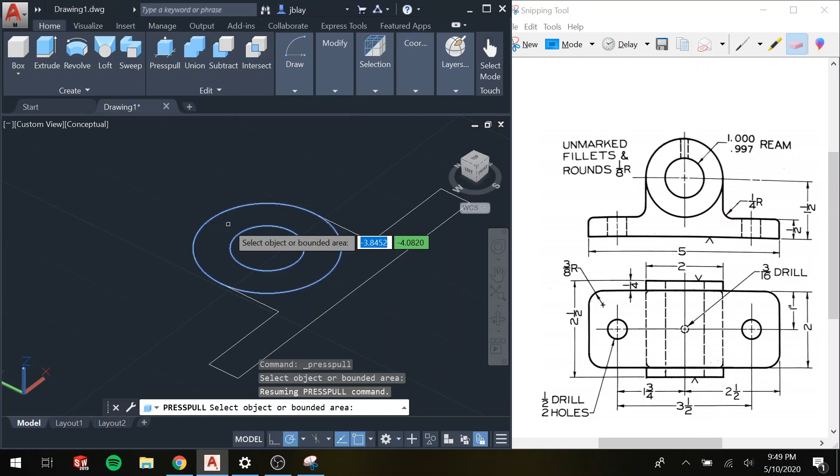It generally will work without joining. There are some instances where it doesn't, and it looks like they updated this new version of AutoCAD to work in a few less scenarios, but it still will work in this scenario. So I can click in here, and I can pull up just that bounded area, which is super convenient for this. Okay, so let me extrude by the depth.

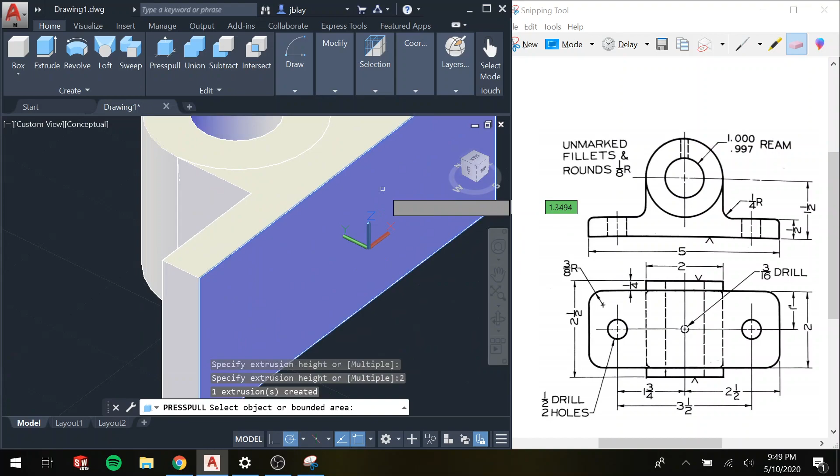I'm not going to do the full depth, 2.5 inches. I'm just going to do this middle area, 2 inches, and then I'll take care of these little extra bits that this cylinder up top goes. It's really easy, I'll show you guys how to do it. So I'll extrude this 2 inches, and then I'll select in this bounded area as well and extrude it 2 inches. And we kind of see this thing starting to take some sort of shape.

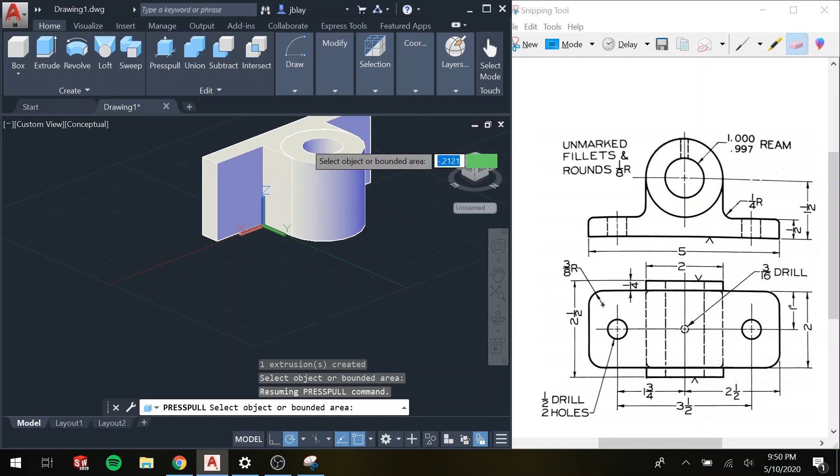Okay, cool. Now what I want to do is pull this cylinder out a little bit further in each direction. Let's see by how much. So this is 2.5 inches. This is 2 inches. The difference is 1/2 inch, so it's going to be 1/4 inch on each end. So I'll show you how easy this is. I don't have a sketch up here now. I just have this cylinder.

But if I type in press pull and I select this bounded area, even though there isn't a sketch, I have a bounded area, it will allow me to pull it up and out. So I can type in 1/4 inch and do the same thing on the bottom. I can select this bounded area. Be very careful to make sure you're not intruding by accident. Make sure it's actually pulling out of the shape before you type in 1/4 inch.

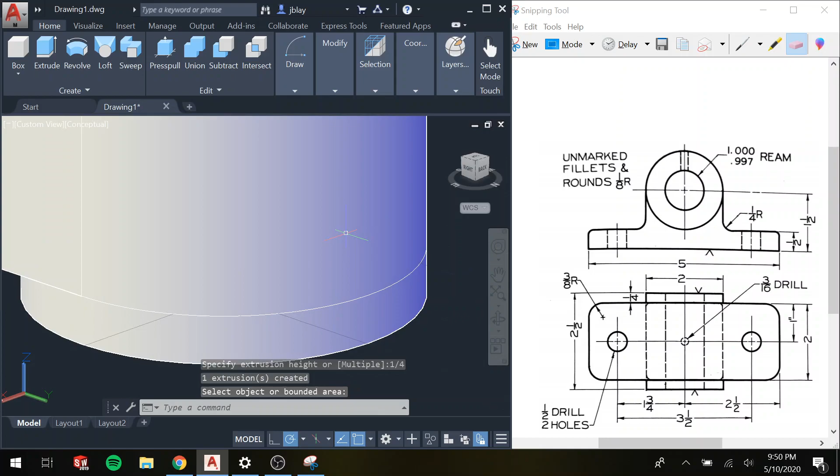And there we have it. We have that kind of pulled out segment. The really nice thing is it makes this whole thing one object. The cylinder is one object, even though it's 3 separate extrusions. Really convenient. All right, now before I do anything else, I'm going to rotate 3D this shape. I want to make sure I select both objects because I'm working with 2 separate objects right now.

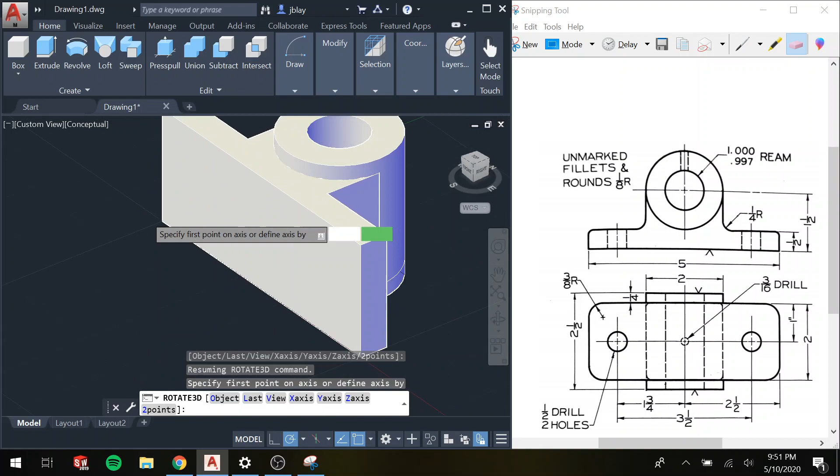Select my axis of symmetry, 90 degrees. Great. Because this is going to make it a little bit easier to work. Now I have the front view, top view, right side view exactly where they should be. You'll notice that I've left behind these lines because when you use press pull to do any action, it will leave the lines behind, unlike extrude, which gets rid of them, which is kind of not a friendly thing about press pull.

Okay, next thing I'm going to do is I'm going to take care of the 2 holes over here. I'm not going to do this one up here like I said before, and the reason for that is in order to do it, you would need to create a plane up there to work off of, and that's something we're not going to get to in this lesson. We're going to do it probably next week or the week after, but I don't want to go into that totally brand new different topic. So we're just going to leave that hole out.

Okay, let's draw holes up here. Let's start by drawing some construction lines. Those are definitely going to help us here. So I'm going to draw 2-point construction lines, one over here, and one over here. And what I'm going to do, oh, it restored the other ones, which makes sense because I've turned my construction line layer back on as I'm working with it. And then I'm going to offset them in each direction. Offset.

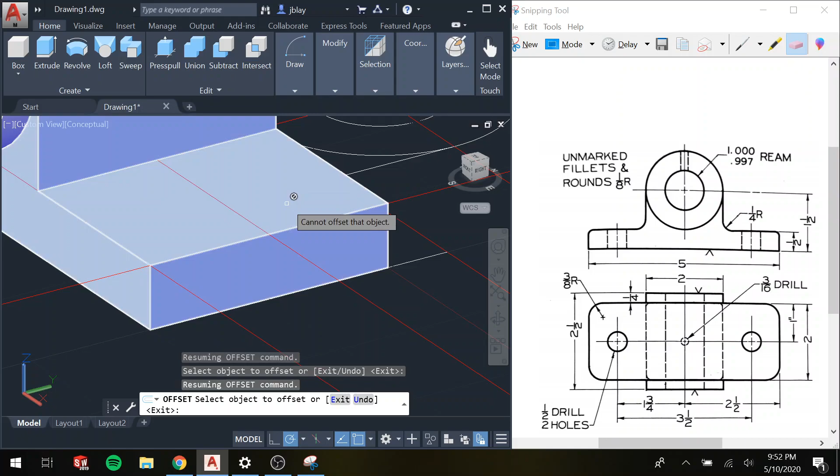First, this one's going to be 1 inch. This is going to be in 1 inch. And I want to rotate a little bit to make sure it went in the right direction. We're not working on a weird plane or anything. Okay, that looks good. And then we're going to offset this construction line. And it goes in, let's see here. We got to do a little bit of calculation. So this is 3.5 inches between these. This is really annoying that they did it this way.

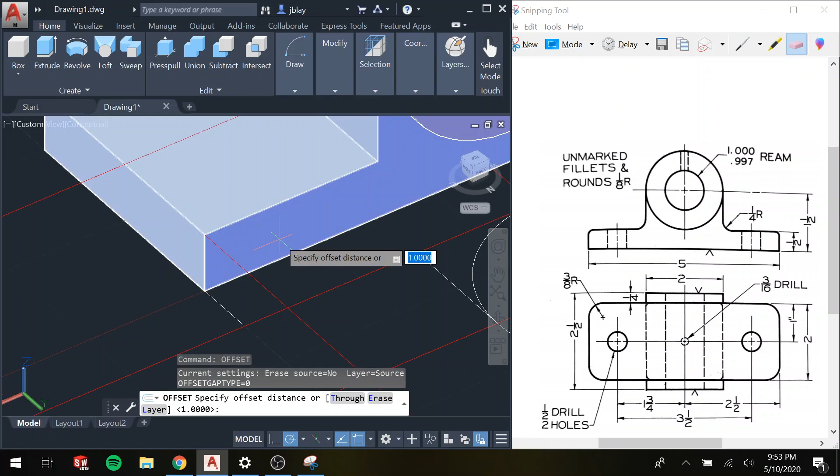Okay, this is 2.5 inches. And this is 3.5 inches. 3.5 inches divided by 2 is 1 3/4. So this section here is 1 3/4. So this is going to be 2.5 minus 1 3/4. So that's going to be 3/4 of an inch. Okay, great. So let me offset by 3/4 this construction line here. And then I know my hole is going to fall right in that space.

So I'll draw a circle, make sure it's highlighting blue, and then I'll set the radius to be, let's see, where do we have the radius of these two? Okay, great. This is going to be a 1/2 inch drill, 2 holes. 1/2 inch, that's diameter. So our radius is going to be 1/4. And then we'll press pull and just pull it down. I'm not even going to type in a number. I'm just going to pull it down all the way through, and it puts a hole there for us. Fantastic. Then we need to do the same thing on the other side.

There is an easier way where I could have just done this twice in one go, but we're going to talk about that again on a future day. I'm hoping to not overwhelm you guys just yet. So I'm going to do the same thing as I did on the far end on this side. Draw my construction lines first, then offset first by 1 inch. Be very careful not to select the wrong construction line. I actually don't need to offset this one because it went all the way through. But I guess what's done is done.

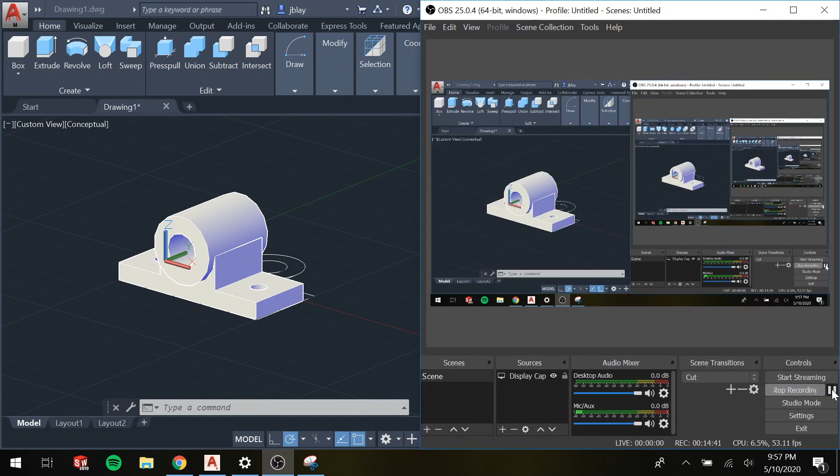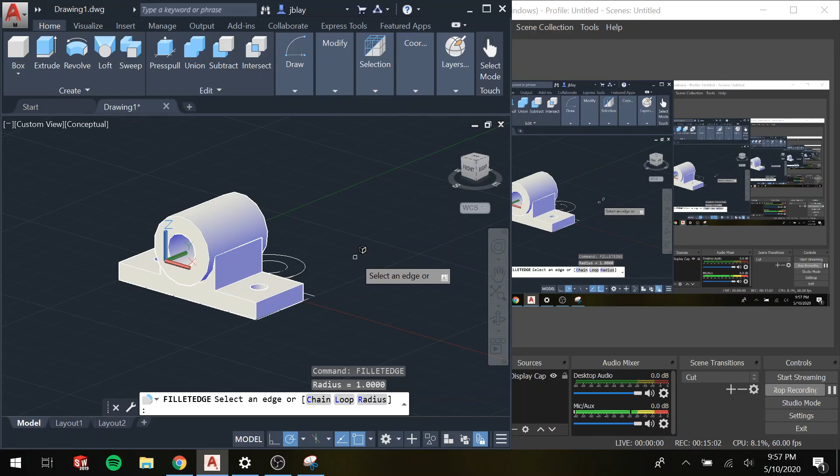I want you to type in fillet, and you're not going to go to fillet because this first fillet that you see, that's for 2D filleting. We want to do 3D filleting, so we're going to type in fillet edge. That's what we're going to use, fillet edge. It's going to prompt you to select an edge, but you don't want to start selecting an edge right away because you want to first input your radius.

If you look at the command bar, you're going to have chain, loop, or radius. If you don't have this in your command bar, you could press down on your keyboard to get to radius and hit enter. We want to enter the radius we want to achieve. I know I want my radius for these two corners to be 1/4 of an inch, so I'm going to type in 1/4 of an inch.

And now I will select the edge that I want to fillet, and I'll select the other edge I want to fillet at that size. And I'll hit enter. Press enter again to accept the fillet. And just like that, it puts a filleted edge right there for me. Really easy, really convenient. Okay, let's take care of these two over here.

So I'm going to go fillet edge again. This time, since I'm doing these two corners, the radius is going to be 1/8 of an inch. I'll select the two corners. I'm not hitting enter, I'm just clicking on them. And then I hit enter, and then I hit enter again. Okay, now I need to take care of these 4 corners and I'm going to be done.

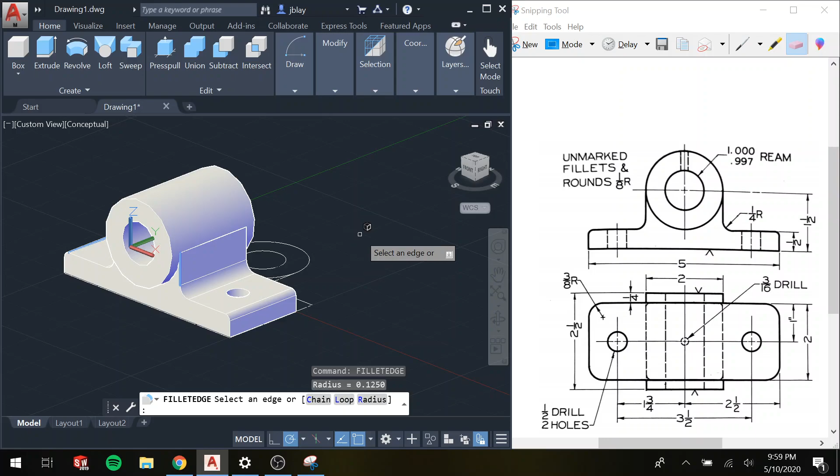So fillet edge. What's it going to be? 3/8 of an inch. And I'll select all the edges that I want filleted. This might give me a little bit of an issue. Sometimes when you have fillets in 2 directions intersecting, it'll give you an error. So let's see what happens when I try that. If that doesn't work, I have something else we'll do instead.

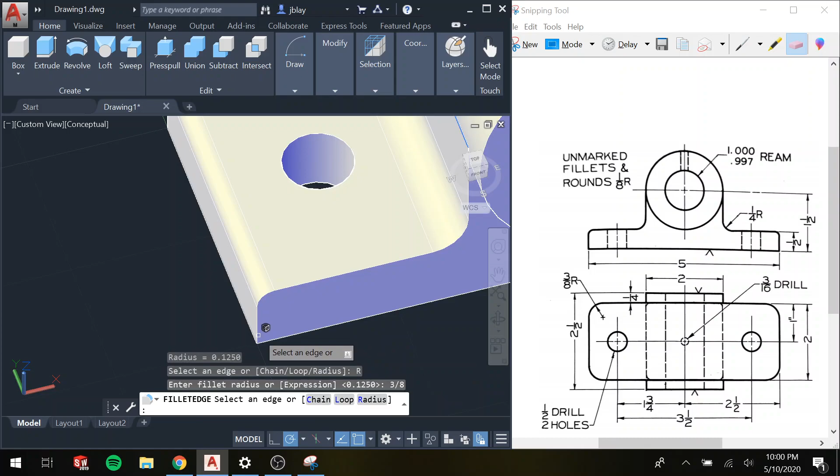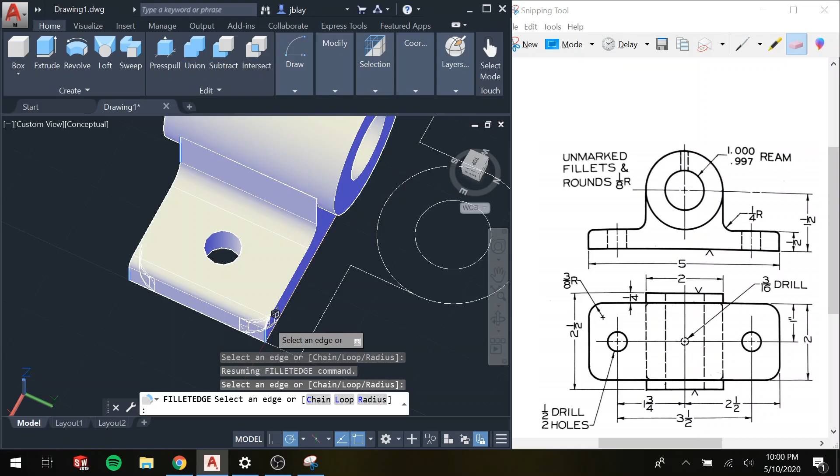No, it did not look like that worked. Let's set the radius to be 3/8 of an inch. There it goes. I don't know why I did that weird thing the first time. Maybe I misentered the radius. Okay, good. That's much better because it's giving me that preview. When it gives you that preview, that means it's going to work, I hope. Okay, here we go. Finished product.

Right now, though, this is 2 separate objects. We want to get rid of these lines, and we want to move these 2 objects. You can just press move, hit enter, select both objects, hit enter again, select the base point, and just slide this guy over. And then you can go ahead and delete these pesky lines.

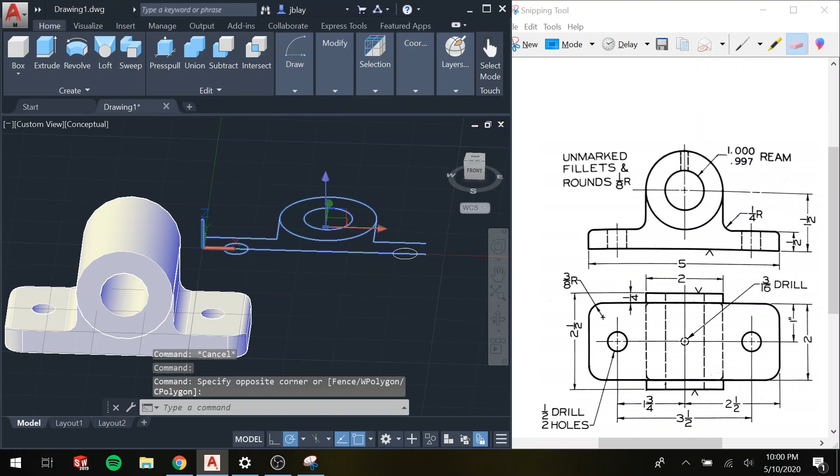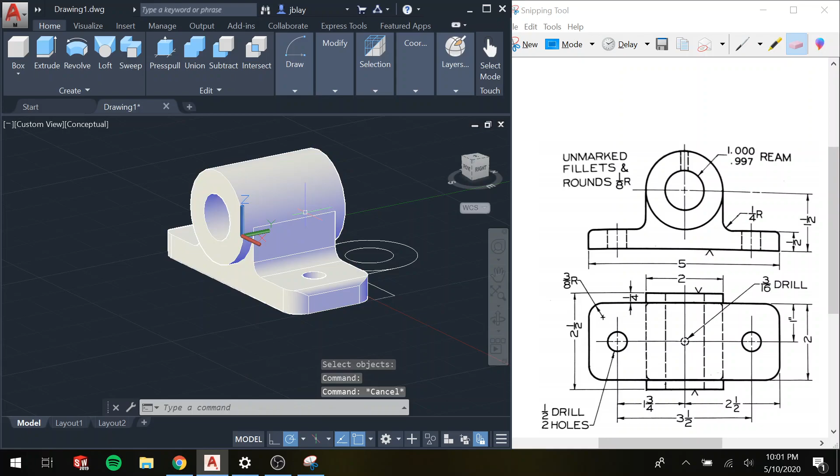You could also combine these 2 into one object using the command union, which is like join, except it's for 3D objects. So union, hit enter, select the 2 objects, hit enter again, and now it's one object. So I can just move it all as one, like this, delete it, and I have my finished product.

Okay, so that's it. That's how you use the fillet tool. That's how we do it. We got some more practice in.